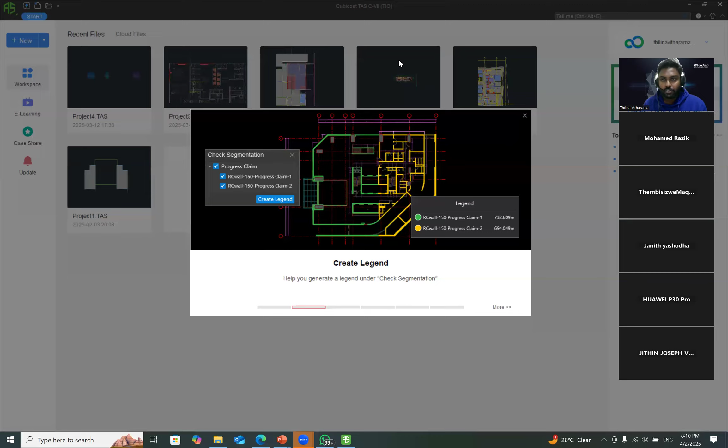Okay, so record your timing. Now the timing is 8:10 p.m., which is night, this is UAE timing, so 10 minutes past 8. Record the timing. I will click on New, then give a name to this project - CubiCost 1 - then I will select the measurement rule.

This software is a little different from other software available in the world - it is embedded with the measurement rule, so you can extract all the quantities according to the measurement rule. This is the difference between CubiCost and other measurement software in the world. I will go with NRM2, click OK, then proceed with the quantification.

Now this is the CubiCost software interface. Time is 8:11. I will go to the BIM project and click on this BIM model, then click Import Revit File, then click this folder icon, then select a 3D model, click Open, and click Open again.

This is very, very important. Now I will select the basement floor, click Next, then click Next again. Then the software will import all the information from this Revit model - it's still less than 1 minute. I will click OK again. This is the Revit model - you can import a complete Revit model within 1 minute using this CubiCost 5D BIM software.

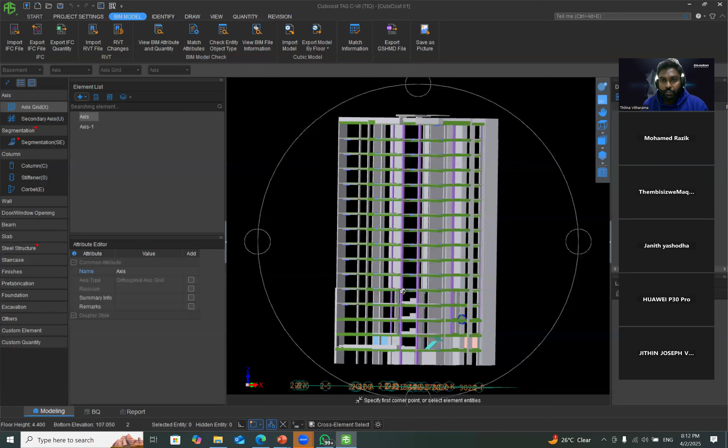This is the BIM model. Now I'm going to quantify this - I will click on Quantity and click Calculate. I can quantify this BIM model using this calculate function. Now you can see a lot of red color elements here - what are those red color elements? I will explain one by one.

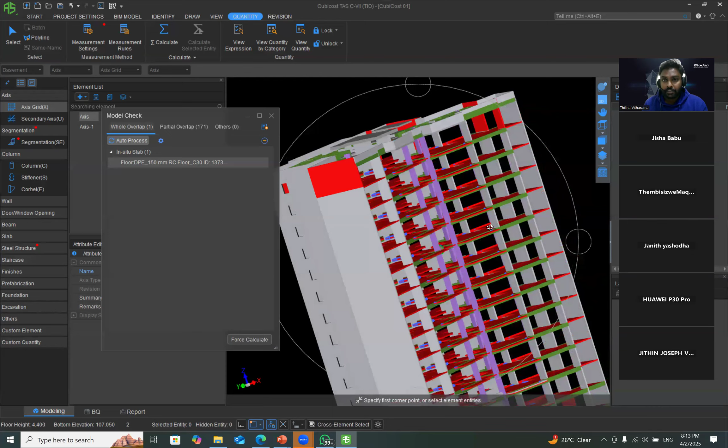These designs will be done by architects or modelers - they don't care about the quantification part, they model the building according to their preference. But we are quantity surveyors - we have to calculate this building by ourselves, and we have to get accurate quantities.

The software is intelligent enough to detect these clashes, and it is intelligent enough to auto-correct these clashes. This is the beauty of CubiCost 5D BIM software compared to other software available in the market. Now I will show you how to do that.

If I go to this partial overlap, and double click on this wall, if I click on this ID, you can see this is the location. This particular wall is overlapping with this bottom wall. You can clearly see this overlapping. The software is intelligent enough to identify these overlappings. We call this clash detection.

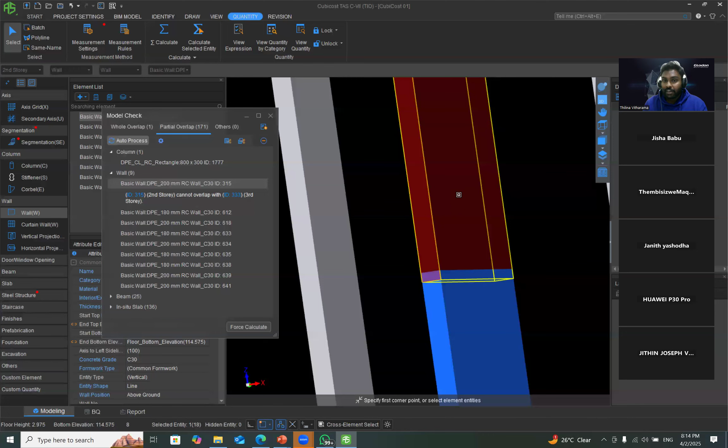This is the only software available in the market with this particular feature. So after identifying these clashes, the software is intelligent enough to correct them. If I click on this auto process, the software will eliminate the clash. Now you can see no clash. This is the beauty of CubiCost 5D software.

If I go to this whole overlap, I can see this particular slab is totally overlapping with another slab. And if I click on this auto process, I can eliminate this clash. Then I can proceed with the quantification. This is the beauty of modern quantity surveying.

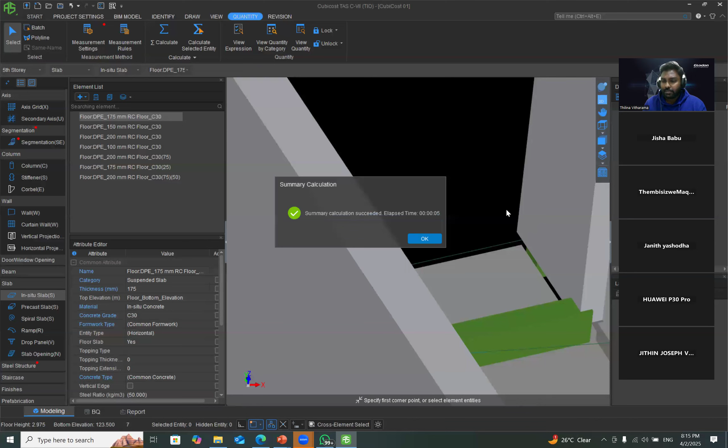I spent less than 5 minutes, and I detected all the clashes and calculated this building. So you can see the quantity report like this for column, wall opening, beam, in-situ slab, slab opening, staircase flight, room, wall finishes. I have calculated every element. This is very important.

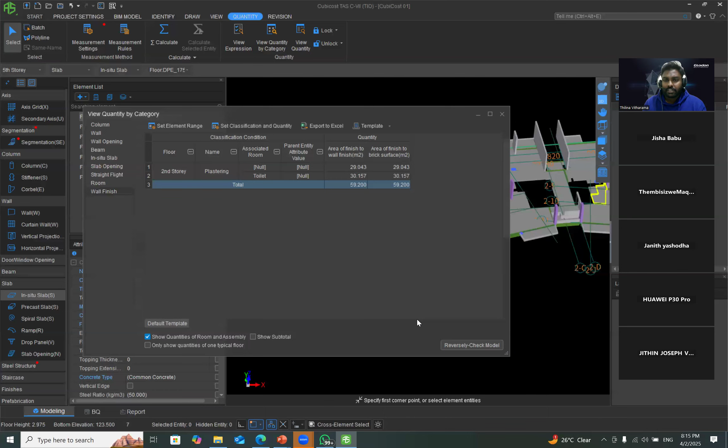We are quantity surveyors. We don't trust these quantities just because a random guy came and told us this is the most advanced quantity surveying software in the world, and he has calculated the quantities of this building. Why should we trust this random guy? Those are the questions inside your head. I will resolve those issues one by one.

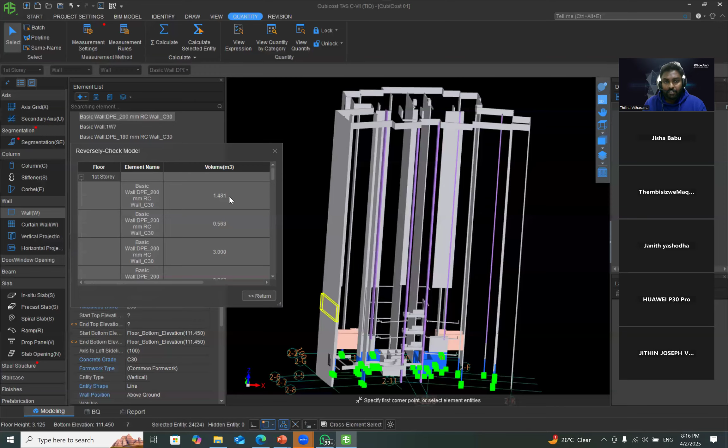The software is intelligent enough to reversely check these elements with the quantities. I will show you how to do it. If you go to this wall and click on this particular quantity, you can reversely check this quantity with the model. If I click on the quantity, I can see the location. You can trace back your quantities very easily by using this amazing software.

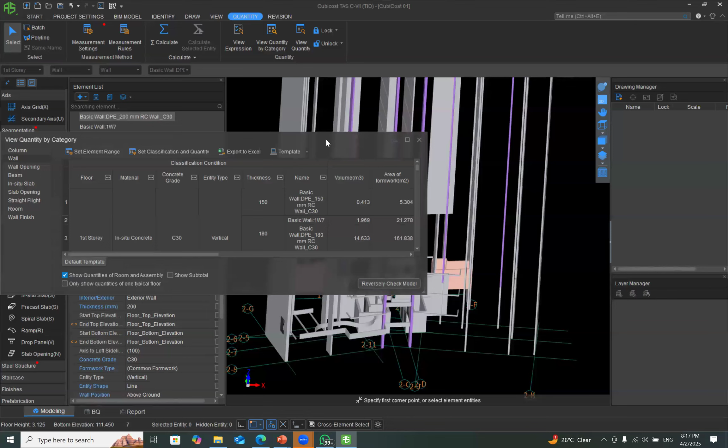Is this enough, quantity surveyors? I don't think so. We are intelligent quantity surveyors. We don't trust these quantities. I can reversely check these quantities, but why should I have to trust this random guy? This is not enough for us, because we are intelligent quantity surveyors. I will show you a few other methods to verify these quantities.

If I click on this particular wall, I can go to this view expression. Then you can see this is the length of this particular wall, this is the height, and this is the thickness, and you can see it deducted the opening, deducted in-situ slab. So you can get the comprehensive quantity breakdown of this particular wall. If I click on this arrow and click on 3D deduction, I can get further elaboration. This is the original quantity.

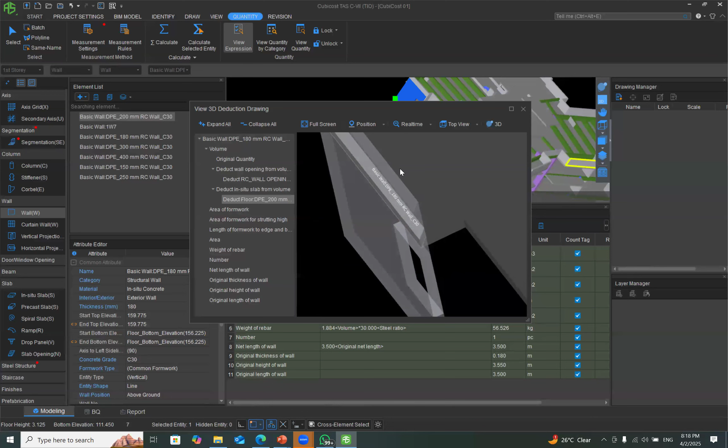This is the wall element, and you can see this is the deducted wall opening, and you can see this is the deducted slab. So you can get 100% accurate quantity according to the measurement rule by using this amazing software.

Is this enough? I don't think so. This is not enough. We can have quantities like this. What is this? If I go to wall, I can see wall volume, and I can see wall concrete formwork. I can see the wall area. But this is not enough.

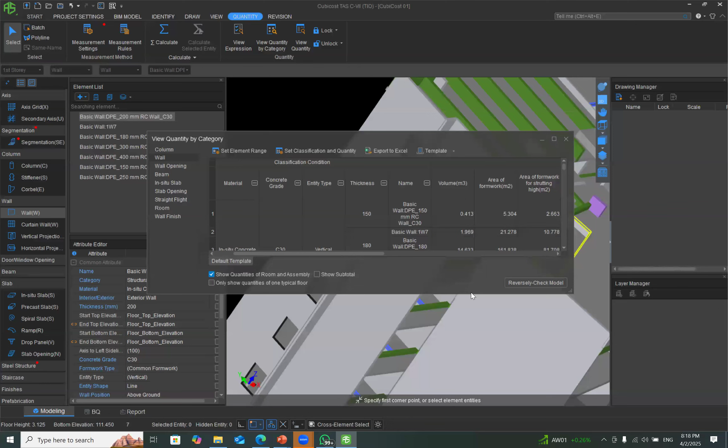We are quantity surveyors. We are more familiar with TDS sheets. If I go to this report and click OK, and go to this quantity measurement sheet, I can generate the quantity measurement sheet automatically. So this is what you want as a quantity surveyor. You can see number, length, width, height, then the volume. We started our quantity surveying journey by preparing TDS sheets, by preparing measurement sheets. This is the exact format. You can see this is the element, and the grid reference, and number, length, width, height, and the volume. This is what we want.

So you can get it by using this CubiCost 5D BIM software. I spent less than 10 minutes and extracted and prepared the measurement sheet of a big building.

Okay, so this is the beauty of modern quantity surveying, and you can easily export this to an Excel sheet. Can you do this by using PlanSwift, Bluebeam, or CostX? Answer is no. This is much more advanced technology than those 2D measurement software. This is the next level. Not only this, but also you can compare a couple of 3D models and you can identify additions and omissions.

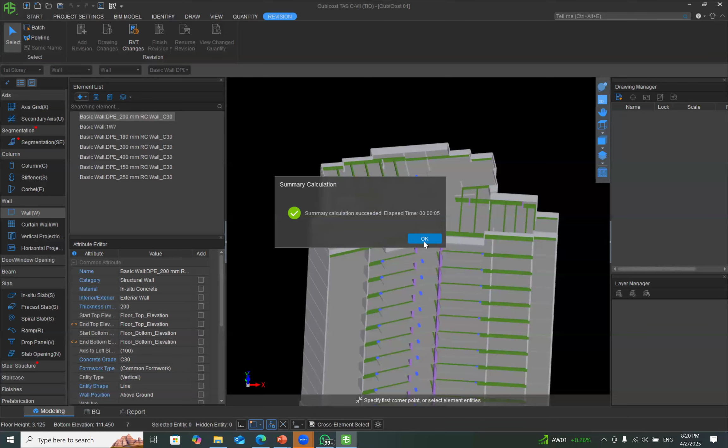I will show you how to do it. If you go to this revision, you can click on Add Revision and you can calculate this particular model. Not only quantification, but also you can conduct variation orders by using this software. I will teach you everything one by one.

Industry is slowly and solidly moving towards building information modeling. 10 years ago, if you take Malaysia, CostX is the most prominent software there. After 10 years, there are 170 QS consultants who are using CubiCost software. More than 500 contractors use CubiCost software in Malaysia. Same thing will happen to UAE as well. I will show you with some evidence.

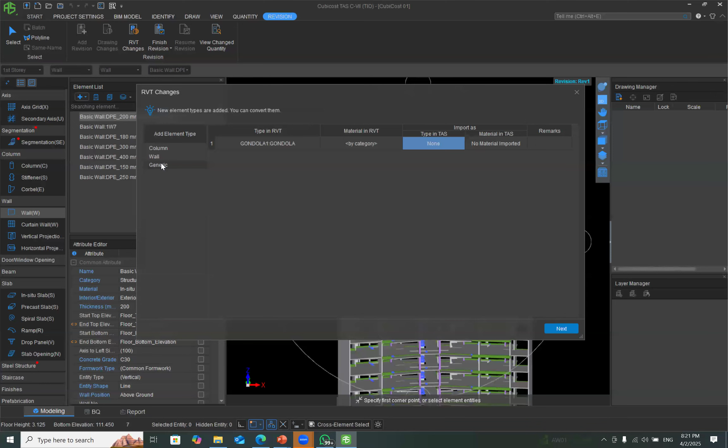So after clicking on this Add Revision, you can go to this Revit Changes and you can select this revision model, click open, and click compare. Can you do this by using CostX? Can you do this by using Revit? My answer is no. So you can click on next, then you can see the comparison.

So these are the newly added elements. You can identify these newly added elements with the Revit ID. This is the beauty of modern quantity surveying. And you can see the deleted items as well. So these are the deleted items. Not only deleted items, you can identify the modified items separately.

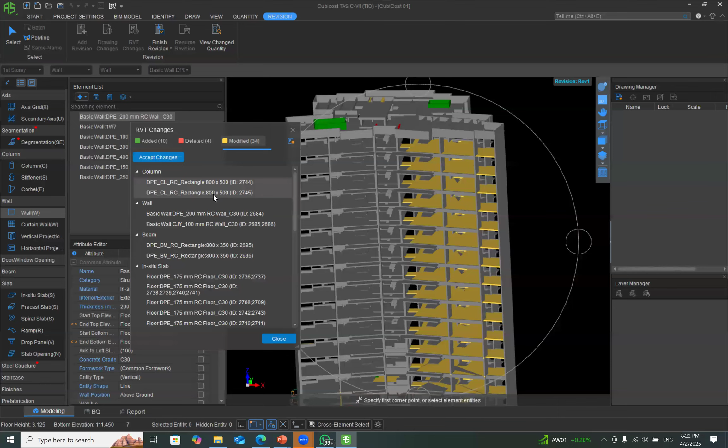This is very important. If you are a post contract quantity surveyor, you know the value of this particular function. Then I will click, I have to select. If you want, you can accept. You can just select these changes and you can click on accept changes.

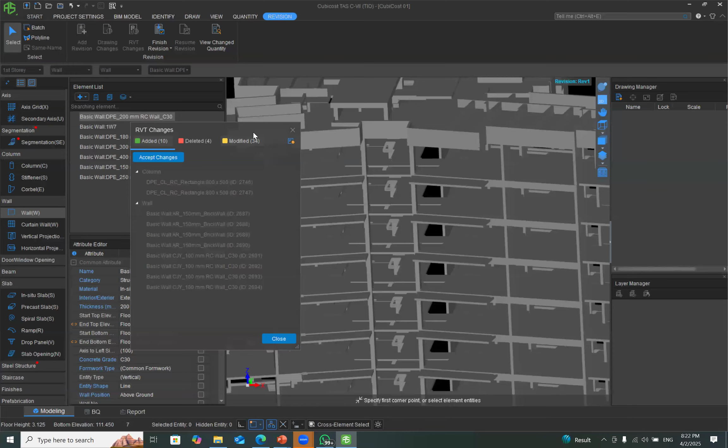If you want, you can keep it as it is. If you want, you can accept the changes. See, you can accept the changes manually. This is the beauty of CubiCost. Accept the changes of these modified elements.

Deleted elements and added elements, then you can finish your revision. These are the Revit changes. Then you can finish your revision. Then you have to calculate it again. You have to calculate it again. Then you can generate the revision model, revision BOQ automatically. I will show you how.

View changed quantity. So you can view the quantities like this. Before revision, after revision, then you can see the changes. See, before revision, after revision, and you can see the changes. So this is the beauty of CubiCost 5D software.

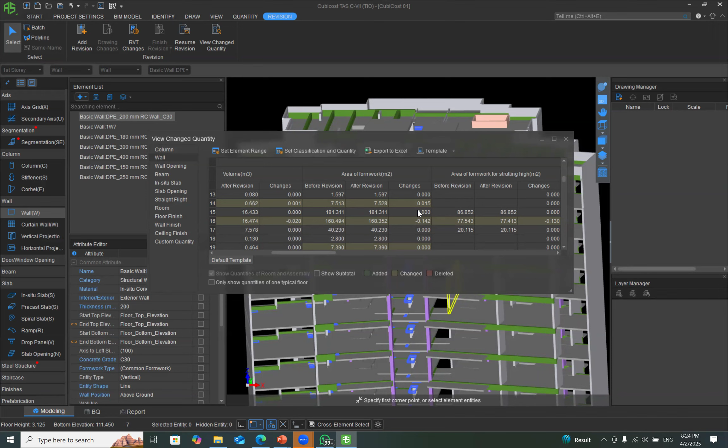Before revision, after revision, changes. If it is minus, it is omission. If it is a plus, it is addition. So this is the modern technology you have to get adapted to. Thank you very much again for your kind participation. I think you have got a very good understanding about the advancement of this technology.

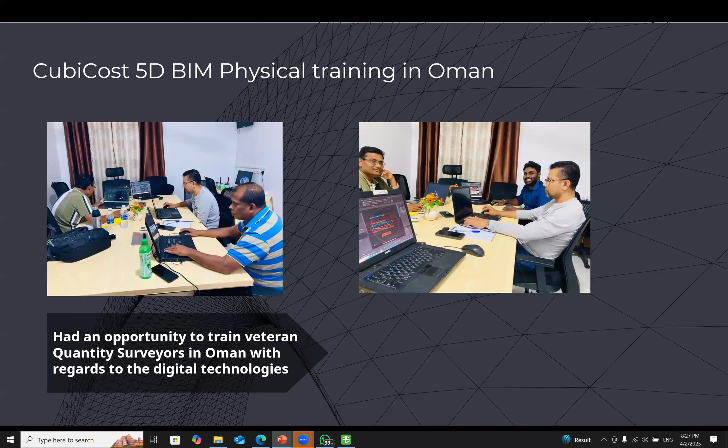This is the first CubiCost 5D training back in 2021, and this is physical training conducted by me in Oman with regards to this CubiCost 5D software. These are company visits with Glodon officials.

This is Mr. Wataru Matsumoto. He's vice president of Glodon, and previous president of Panasonic Thailand. This is another company visit, and physical training in China State UAE.

In UAE there are more than 100 quantity surveyors. This is my QS software all-in-one batch, first batch - 110 students participated for this course. The previous course had 170 students, before that 188, and for this time there are 250 registrations also.

This is the final year BIM module for KDU students, and this is my BIM with Revit and Navisworks course. This is Gleeds staff training - you can search the name of Gleeds on the internet, this is a very old company. Some of these faces are familiar to you.

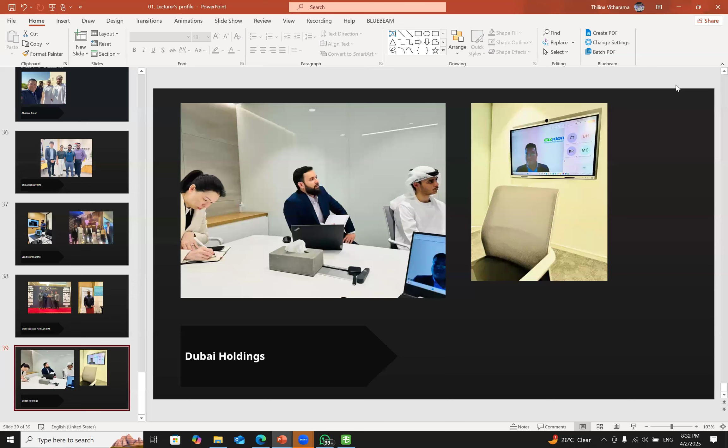So this is about me, and what we have done so far. Up to now I have helped more than 10 quantity surveyors to obtain job opportunities in UAE and Oman, and now more than 13 or 14 companies are using our software in UAE. We need more CubiCost competent quantity surveyors for the Middle East region, because we strongly believe that sooner or later this industry will be fully adapted to this CubiCost 5D software, and as quantity surveyors we have to be ready for that.

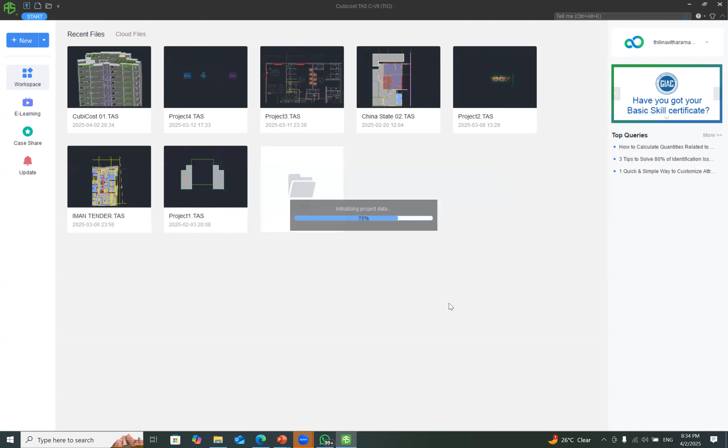I will share my screen again. You can see this CubiCost 5D software. I will start a new project, and this time I will explain the 2D quantification. You can compare this software with other 2D measurement software available and see the difference. I will go with NRM2 again - all the measurement rules available are embedded in this software because we have the latest technology. We reinvest 40% of our profit into software development, research and development.

Now I will quickly go to this drawing manager and import some drawings to this software. I will go to my desktop, then select my drawings. Just give me a moment.

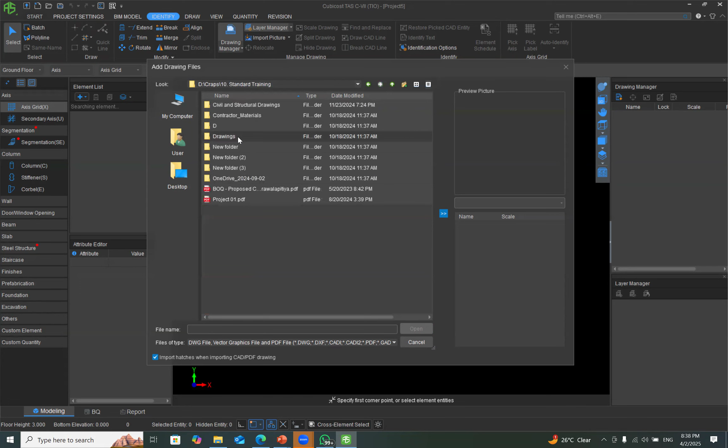Extremely sorry for the inconvenience. I will go to my local disk D, then to this folder, Glodden. We have to find the standard training folder. Under standard trainings, I can see the civil structural drawings. I will select these three drawings and import them - you can see these are some 2D drawings.

First I will go to this split drawing function and separate this structural ground floor. If I click on this name, it will appear here, then I click OK, and this is my structural ground floor. You can select one drawing from this drawing set and split it, and you can see that particular drawing separated like this.

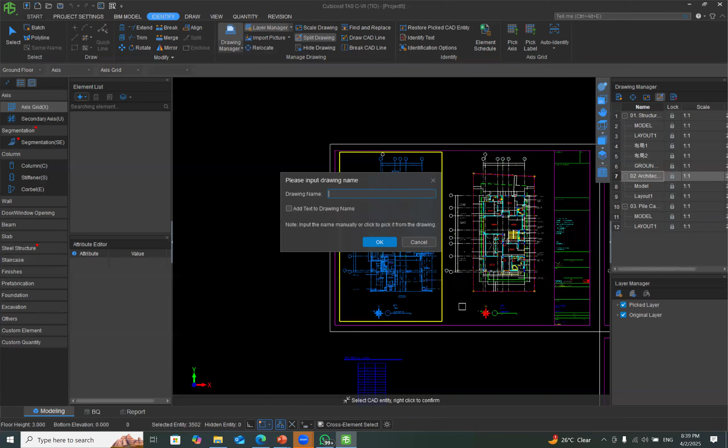Then I will select a drawing from this architectural set. I can just split this drawing - right click, then click on the drawing's name and separate it. I will do the same to this pile cap drawing as well. This is amazing, right? You can click on the name and separate that drawing. So this is my structural ground floor drawing.

Now I will show you the elevations of this drawing. This is the elevation, this is the right elevation, and this is the rear elevation. You can see this is our ground floor level, and the first floor above it, and we have a roof floor too. Ground floor height is 4.000 meters, first floor height is 4.000 meters, so we know the heights of ground floor and first floor.

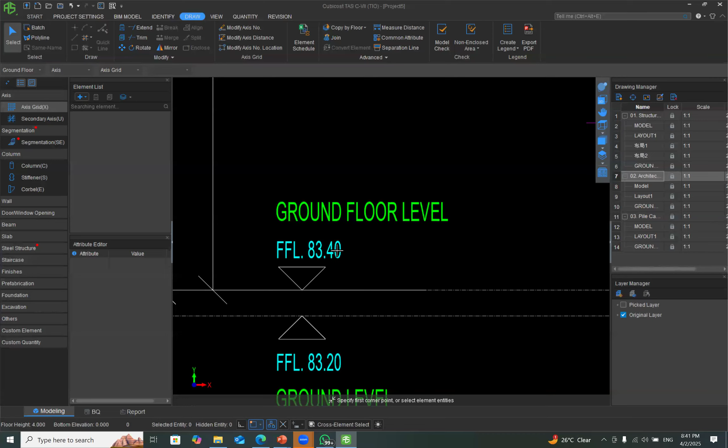After observing these details, we can enter them in this floor setting. I have foundation floor, ground floor, first floor, and a roof floor. My ground floor height is 4 meters, first floor height is 4 meters. Then what is my ground elevation? My ground elevation is 83.4 - this is the finished floor elevation, ground floor level 83.4.

I will go to this project settings and enter 83.4 here. Now you can see I have entered all the details regarding floor heights and elevations. This software is very intelligent - you can select the concrete grade according to your preference. You have to go to the specifications and give the correct concrete grade, then you can extract material quantities according to that concrete grade.

Okay, so this is very important. Then the concrete category - there are a lot of concrete categories: common concrete, lightweight, self-compacting, waterproof concrete. There are plenty of concrete categories. Then the formwork type - you can select the formwork type as well. Then the mortar grade, mortar category, steel ratio - you can give all the details regarding concrete elements in this bottom table.

So after that, we can go back to our drawings, then we can start our modeling. This is very simple. This is my ground floor structural drawing.

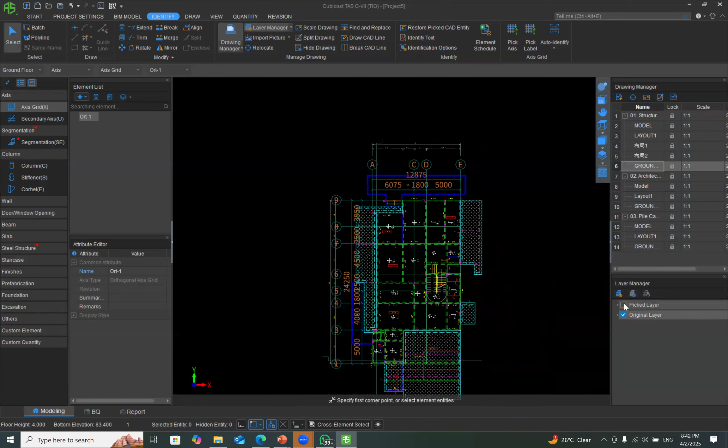I will go to axis, then go to identify, pick axis, right click, pick label. First click on the circle, then the label, right click, then auto identify. So you can generate a separate axis grid line for your modeling, because we need these grid references with our quantities. We can enhance that benefit through this CubiCost software.

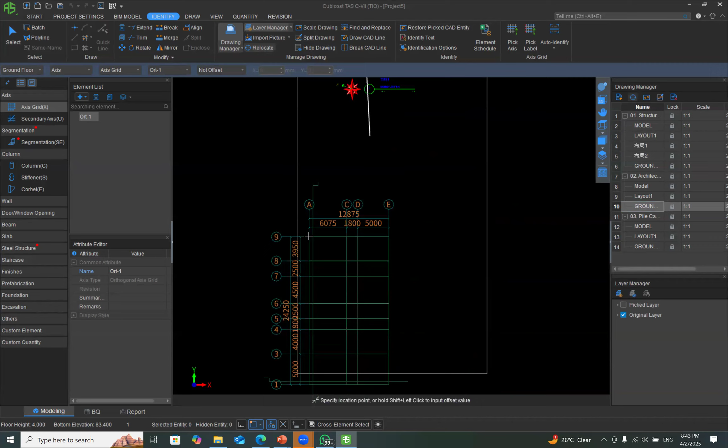So after creating the axis grid line, I have to align other drawings with this axis grid line. This is very important - we have to align, because we are generating a 3D model, axis grid line A, axis grid line 9. So we have to align this drawing's axis grid line with our pre-created axis grid line.

Now it is very simple. I will go to this structural drawing and start the modeling. I can go to column, then click on pick sideline, then click on the column, right click, pick label. I can click on the label, right click, then click on auto identification.

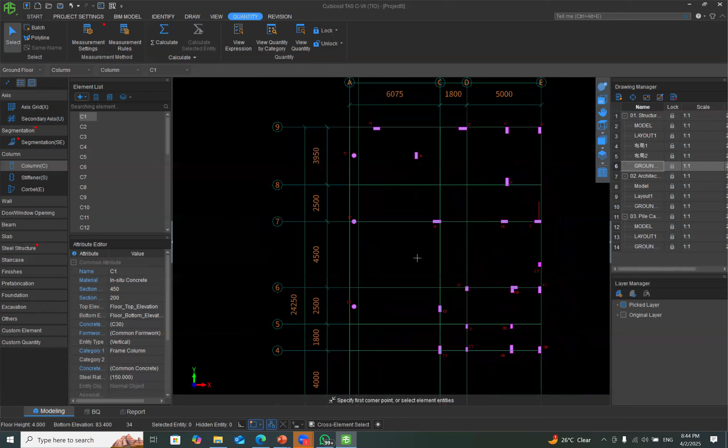I can generate the columns within 1 second. After that I can quickly go to the quantities and click on calculate. I can proceed with the calculation and get all the quantities of these columns within a couple of seconds - volume, area of formwork, numbers, weight of rebar, everything within a very short period of time. So if you have the AutoCAD drawing, this is possible. Even if you have a vector PDF drawing, you can do this very easily.

After this I will show you how to generate walls. It is very simple - you can go to this architecture drawing, then go to identify, pick masonry wall sideline. You can click on the wall sideline, right click, then you have to pick doors and windows sidelines as well - first the doors, then the windows, then right click, auto identify. You can generate all the walls automatically on top of this 2D drawing.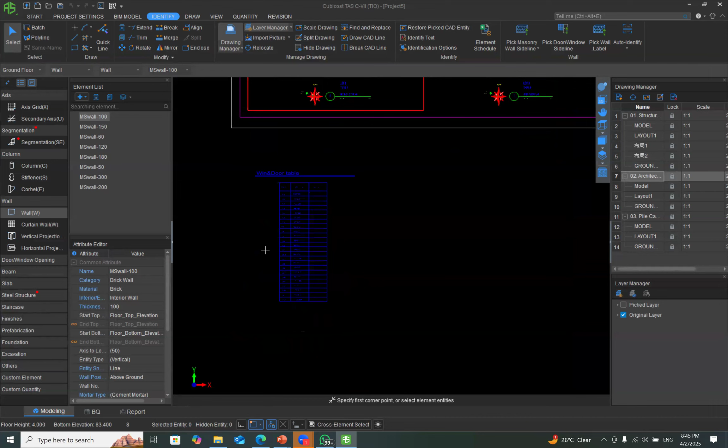Not only walls, but also you can generate doors and windows. You can see the doors and windows table here. The software is intelligent enough to identify every detail from this doors and windows table and import it into the software.

You can go to wall opening and click on doors, then use this auto identification feature to identify all the details. Right click - you can see D1, D2, D3, and all the dimensions. Then you can click identify. So you can import these doors and windows details into the software, then proceed with the modeling.

So this is my ground floor drawing. Then I will go back to walls, identify doors and windows label - pick doors and windows label, click on this label, right click, then auto identify. The software will generate all the doors and windows automatically.

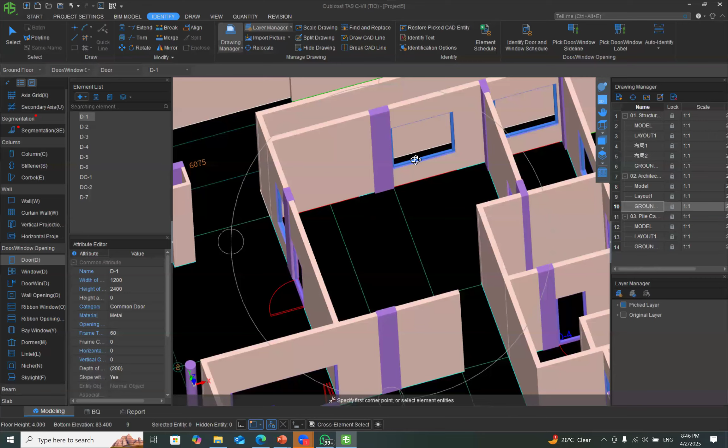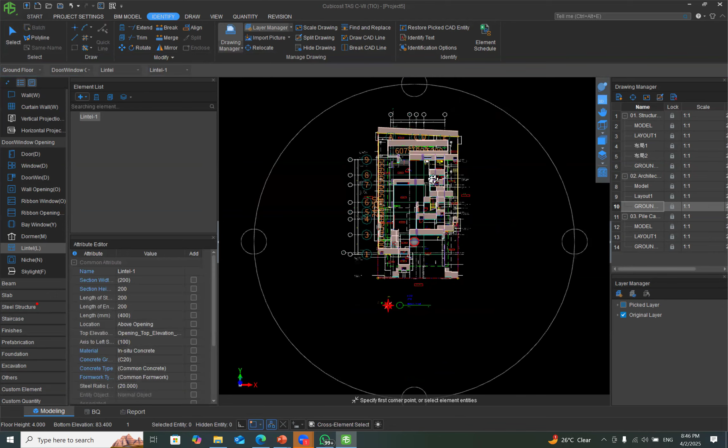Not only doors and windows, but also you can generate lintels automatically. You can go to lintel and click on rectangular lintel, then give the sectional height - I will give this as 200. Then give the offsets - I will give 200 and 200. Then I can go to this auto arrange feature, select this one and right click. I can generate all the lintels automatically, and this is the offset.

Then I will generate all the beams. I can generate all the beams very easily - press the sideline, right click, press the sideline, right click, then the label, right click, then auto identify. You can generate all the beams automatically. Not only beams, you can generate slabs as well - if you have the slab label, within 2 clicks you can generate all the slabs. Within 2 clicks, the software is intelligent.

You can check the thickness. This is the slab. Slab thickness is 175. If you click on this slab, thickness is 150. The software is intelligent enough to detect the thickness from the label and generate the 3D model.

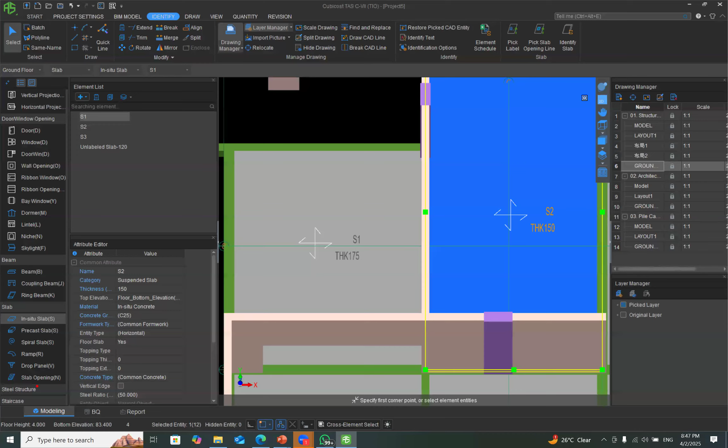This is the modern quantity surveying. In China, no need to click like this. If you import the 2D drawing, the software will generate all the quantities automatically using AI technology. We have the latest technology available in the world, and you can experience that modern technology through us.

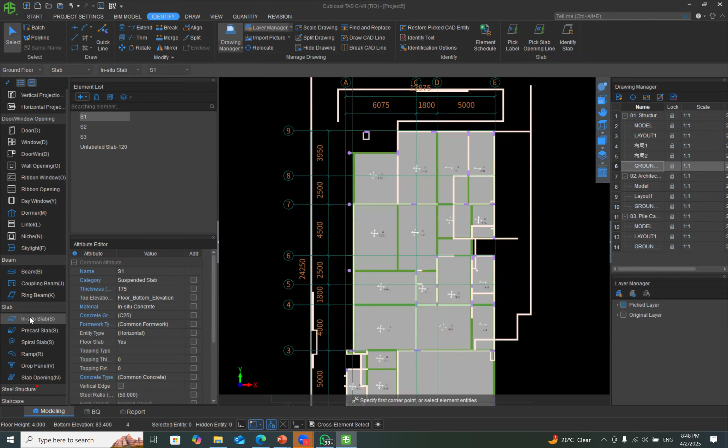Now I will show you how to do the finishes. It is very simple. If you have the finishing schedule, you can directly import finishing elements from this finishing schedule. I will show you how.

If you go to finishes and click on room, you can click on this finishing schedule, then click on export, import file, Excel file, and select this finishing schedule. You can see all the data in this area: floor finishes, exterior wall, horizontal waterproofing, vertical waterproofing, skirting height. Everything you can see. The software is intelligent enough to identify every finishing detail and import it into the software.

I will explain this. You can see entrance - what is the floor finish for entrance? It is cement render. Exterior wall finish is 20 millimeter thick plaster wall. Skirting is 150 by 300, height 150. Ceiling finishes is 20 millimeter thick plaster, with paint. You can identify these data from this table and import into the software.

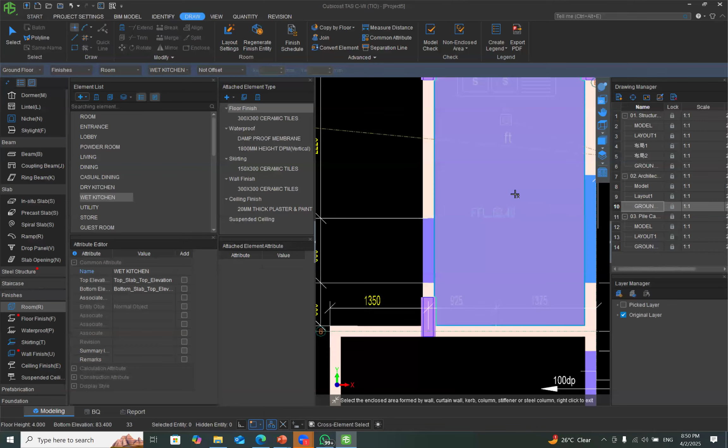Then you have to go to enclosed area. This is enclosed area, and this is wet kitchen - you can select wet kitchen from here. Then you just need to click on this enclosed area and you can apply all the finishes: skirting, wall finish, floor finish, ceiling finish, everything.

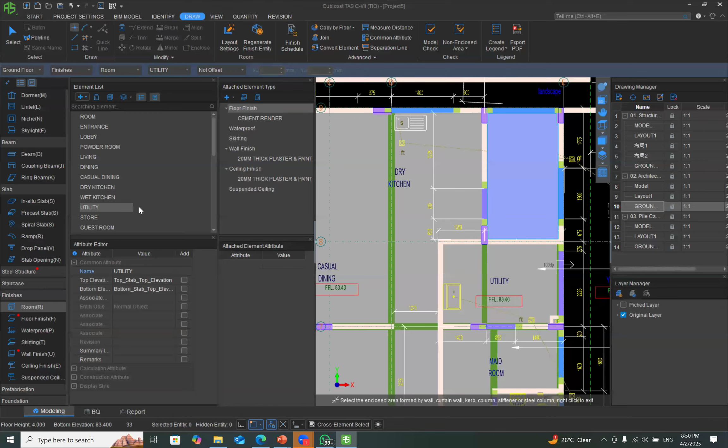You can apply the finishes automatically if you go to utility and easily apply the finishes. If you want to apply finishes for this dry kitchen area, you can use this separation line and separate this area like this, then apply finishes separately. If you go to this dry kitchen and click on this enclosed area, you can apply finishes separately. This is the modern technology you have to get familiar with.

This is how you extract 2D quantities from a 2D drawing. This is the modern way of quantity surveying. If you have any question, please feel free to ask.

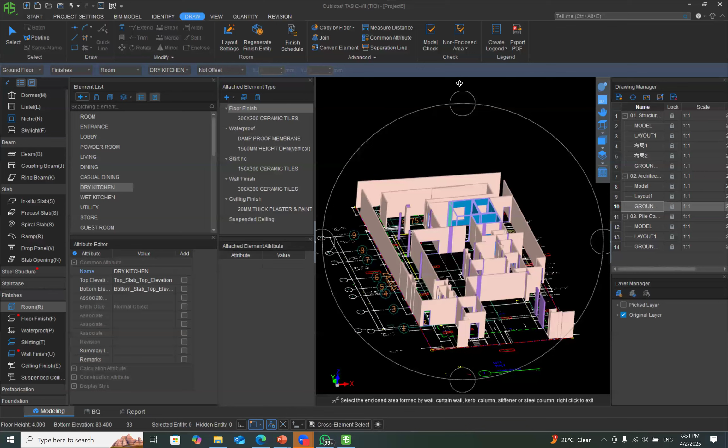Can you do the same thing using PDF drawings? Of course, yes. If you have a vector PDF drawing, you can use the auto identification feature and identify all the elements and generate the 3D model. Even if you have an image, a 2D image, you can generate a 3D model on top of it. So this is like a combination of all other quantity surveying software available in the world.

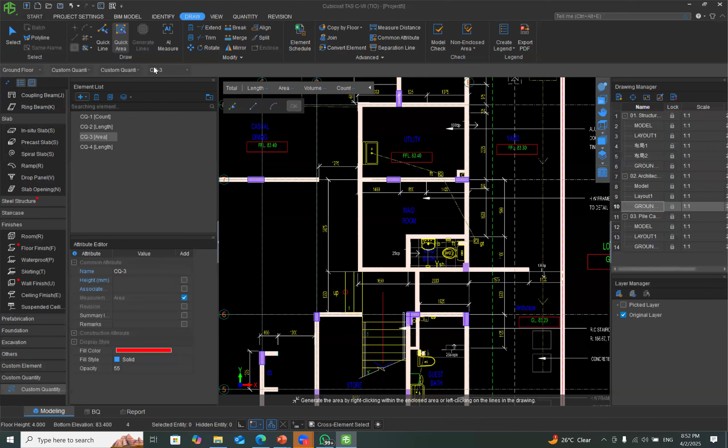If I go to this custom quantity, I can do manual counting, like this. Then if I want to extract the length, I can go ahead and click on this line, right click, then calculate the length. If I want to calculate the area manually, I can go to this area, right click on it, and click OK. I can extract the area as well.

Like this, you can do manual quantification, you can do auto quantification, and you can do many more things. This is the most advanced quantity surveying software available for quantity surveyors, the most advanced, part one.

Very simple - you can calculate the quantity of this enclosed area. Just need to right click and click OK. You can generate the quantity. After that you can adjust it like this.

See, this is the beauty of modern quantity surveying. Okay, if you have any question, please feel free to ask.

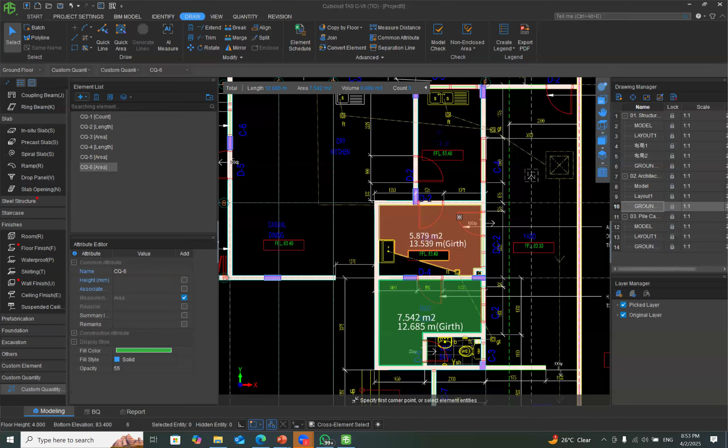What do you mean by AI measure feature? AI measure is our next big thing. If you use this AI measure, software will identify the lines by using AI tools, then software will help you to measure the area. This is a very advanced feature, and software will learn from your drawing. I think you might have heard about machine learning. Software will learn from your drawings, then you can use those learnings for your future measurements.

It's very advanced. Actually, China has a much more advanced AI measure tool. You just need to import the drawing to the software, and AI will measure everything and provide you the quantity report. But the global version still has some limitations. Within a couple of years we will release the full AI software to the market. As quantity surveyors, we have to adapt to this new technology, otherwise it will be hard for us to survive in the market.

Now I will explain a little bit about the Glodon company and validity of this certificate. Glodon is a very big company, a multi-billion company, and we care about efficiency, cost management, quality control, and sustainability.

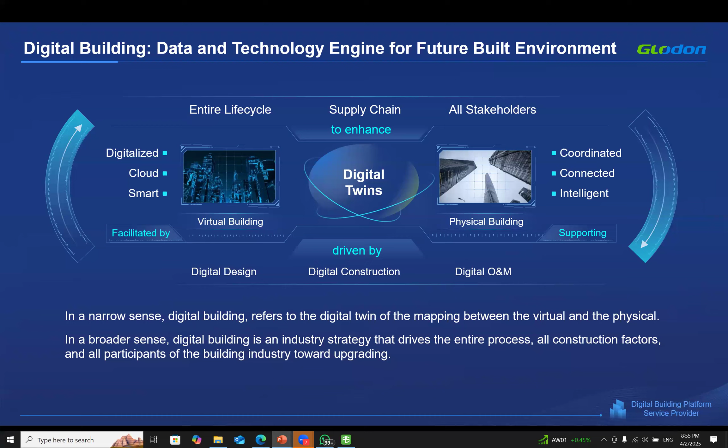Data management is very important in construction industry. Building information modeling is the best way for data management. I will give you a few insights. Most of you are young quantity surveyors now, but after 10-20 years you will become quantity surveying managers, and you have to face these kinds of challenges.

No one wants their work to be transparent. This is a common issue in the construction industry. No one wants to be transparent. Most people try to do fraudulent work. No one wants to take the initiative to learn new technologies and software. This is the common nature. After you become the manager, you will see this.

Your subordinates, or your co-workers, they don't want to take the risk and learn new technologies. The people who work under you don't want to take initiatives and learn new technologies. They're reluctant to do it. That is human nature. No one wants their experience to be devalued.

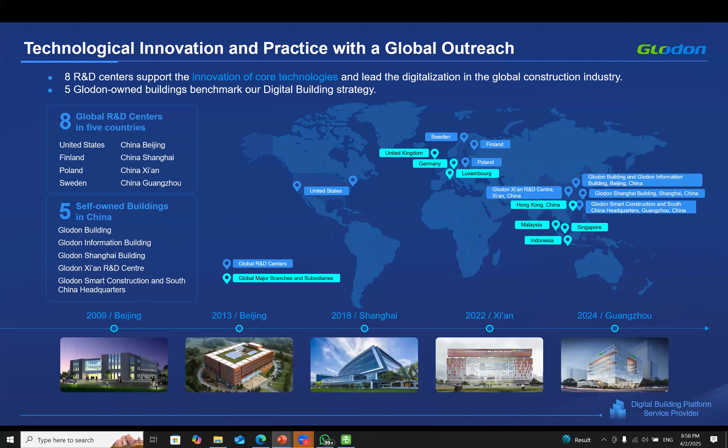We have acquired many building information modeling software companies from the UK, Sweden, and Finland. Most of the European building information modeling software now runs under the Glodon name. We have 8 research and development centers: United States, Finland, Poland, Sweden, and some research and development centers are in China also - you can see Beijing, Shanghai, Xi'an, and Guangzhou buildings. We have more than 10,000 employees, and this is a very big company.

We have construction industry specific parts with proprietary intellectual property rights. We have a lot of patent rights for software development, and we have the most advanced proprietary 3D graphic and design platforms available in the world, and our software is rich with AI applications. You can see some graphic platforms in this picture, and we have more than 130 software products: design software, cost management software, digital software, 5D BIM software, smart site management software, facility management software.

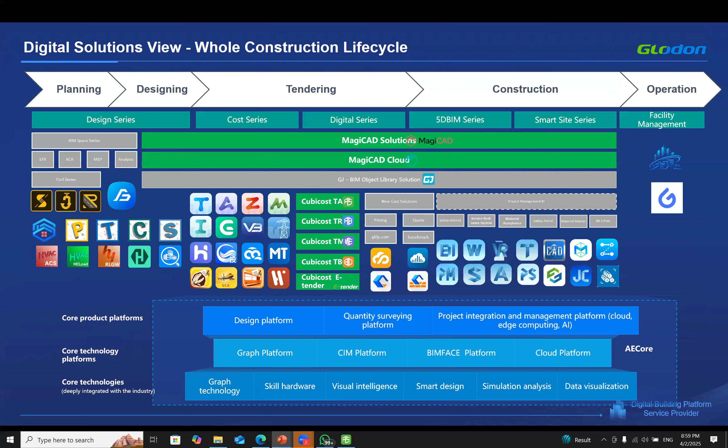Now I'm going to present to you this CubiCost 5D BIM software, which is under cost management. We started our AI journey from machine learning, then moved into deep learning, then generative AI, then we established the AI Innovation Institute back in 2024. We have more than 130 module products, and we want to become the super brain of the construction industry.

Glodon is a very big company. You can see our income is 854 US million dollars. We have acquired 22% of market share in the Chinese construction software market.

Autodesk, PMS, Bentley, and all other competitors are behind us. The overall market is 3.8 billion US dollars, and we have acquired about a quarter of this market. Why 5D BIM digital transformation? We need to get the data from a single source, so data management is very crucial. Most software uses 2D logic, but we have introduced 3D logic for quantity surveying. If you create this 3D model, you can extract quantity and generate quantity reports very easily, and have those quantities in one platform. This is very important.

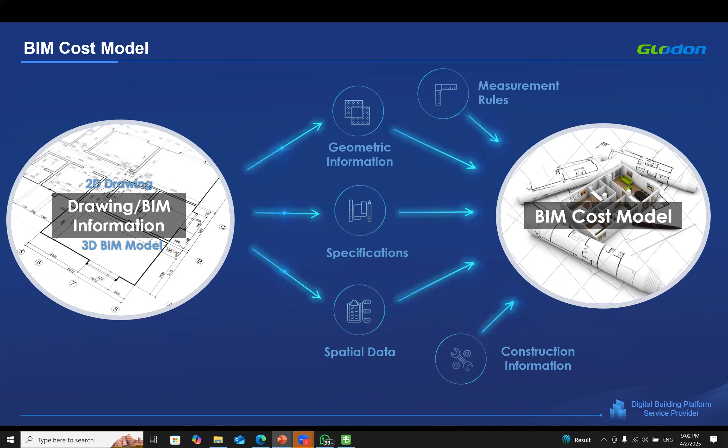This is one focused integrated solution, and you can enhance team collaboration and common data environment management. The software is embedded with measurement rules, and you can generate smart reporting as you witnessed earlier. You can import 2D drawings, building information models, PDF drawings, vector PDFs, and images. We have auto identification tools, and you can generate a 3D model on top of these 2D drawings. First the software reads the drawing, then generates the cost model, then generates all the reports. We have TAS, TBQ, TRB, and TME. TAS is for structural and architectural, TBQ for cost management, TRB for reinforcement, TME for MEP.

Traditional method: 20-30 years ago we used 2D manual drawings for quantity extraction. After a few years, we adapted to AutoCAD plus Excel, which is still very inefficient. Nowadays we use building information modeling for cost management - it's like a smartphone. CubiCost is the most pioneering software for these 3D measurements. I will discuss all these things in detail during our course.

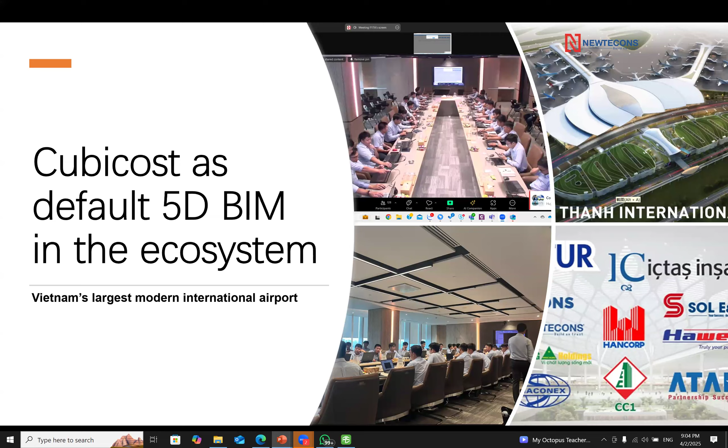What is the reason? CubiCost is the reason. They implemented CubiCost software back in 2019, then completed more than 100 projects using this software. They survived in the Vietnamese construction market. These are some testimonials.

After completing this course, you will get an industry-recognized BIM certification. Our software is accredited by RICS, so this is a valuable certificate for you, and you can call yourself a 5D BIM quantity surveyor after getting this certificate. Now if you have any questions, please feel free to ask.

Okay, enough of boring slides. I will go back to my software again. Now I'm going to show you another magic - this is how we extract reinforcement quantities. This software is intelligent enough to generate bar schedules automatically. You will be surprised after seeing this feature.

This is our TRB software. I will share my screen and show you how to extract reinforcement quantities using this amazing software. This is the modern quantity survey. Can we measure earthwork using the software? Yes, of course, my dear - we can extract earthwork quantities using this amazing software. I will show you how.

I can go to this foundation floor, then go to this pile cap drawing. I will go to foundation and click on pile cap. First I have to go to identify pick sideline. I will click on this sideline, right click, pick label. I will click on this label, right click, and auto identify. I can generate all the pile caps.

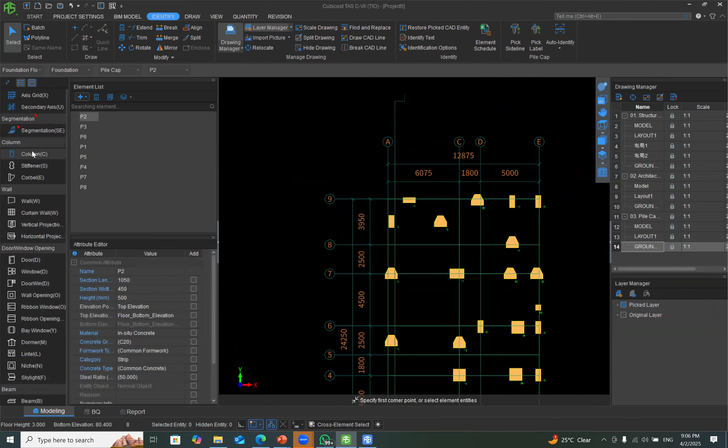Then I have to generate the column neck as well. I will go to this column, click on pick sideline, click on this label, right click, pick label, right click, then auto identify. I have generated the column neck. Then I have to generate the screed as well. I will quickly go to foundation again, then click on blindings. I will click on plus and click on blindings.

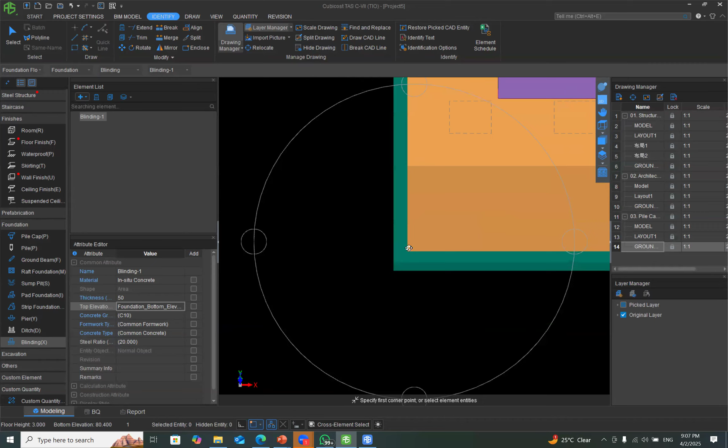I will give the thickness for this blinding. Then I will click on this one and pile cap. Then I will give the offset as 50. You can generate the blinding as well. So this is the blinding and this is the offset. You can change the offset whenever you want.

Then, my dear, you asked me about the earthwork. It is very simple. You just need to go to draw and click on auto generate excavation. If you want, you can give the working space and click OK. The software is intelligent enough to generate the earthworks automatically.

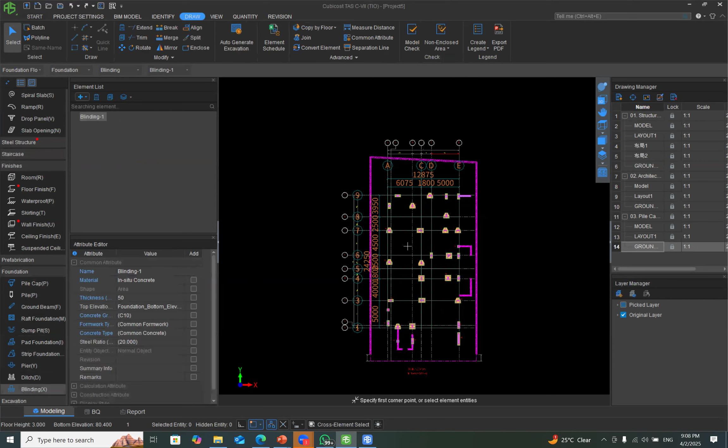I will show you the 3D model. Our ground elevation is 83.4. Then I will generate this excavation. Sorry, not the earthwork support, this is excavation. Like this, we can generate the excavation automatically with the offset.

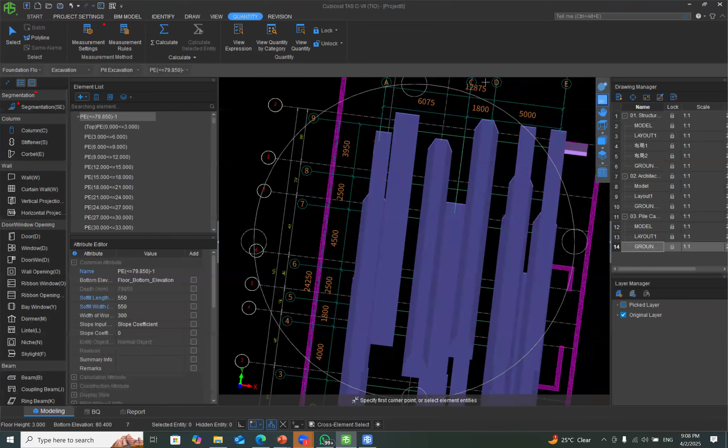83.4. Enter. Wait a second. Under the project information, we have to give the height correctly, then proceed with this. Please give me a moment. Blindings, generate excavation, click OK. Now it's okay. Like this, we can generate the excavation.

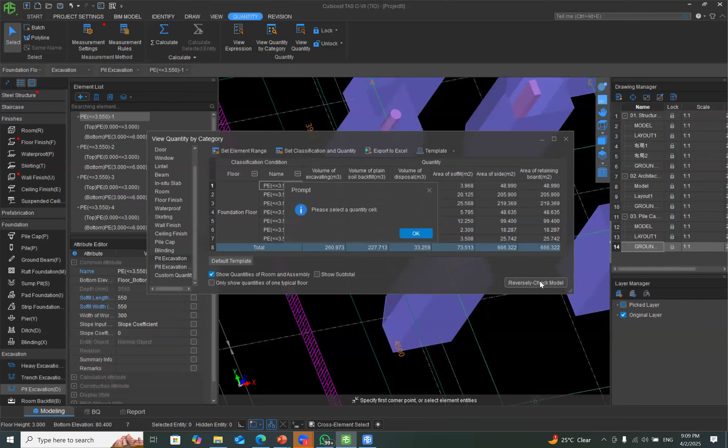After generating the excavation, we can check our quantities as well. You can get all the earthwork quantities. See pit excavation quantity. All the volumes you can see, and you can reversely check with the model as well. You can see the locations. Then you can check other quantities as well. Pit excavation, then volume of excavation, soil backfill, disposal. You can see all the earthwork quantities.

I think you have got a clear answer for your question. Yes. Makuhena, you have got clear answer, right?

Two years ago, we planned to purchase CostX software. So if you check the net worth of CostX and CubiCost, CubiCost's net worth is very high. We have acquired a lot of software from Europe. Recently we purchased MagiCAD, the most advanced MEP design software available in Europe. We acquired that particular software, and we tried to purchase CostX also. But if you have used CostX, 2010 CostX is similar to 2024 CostX. They haven't invested in software development, they are using the same logic. We realized that it is worthless, and we didn't purchase CostX software.

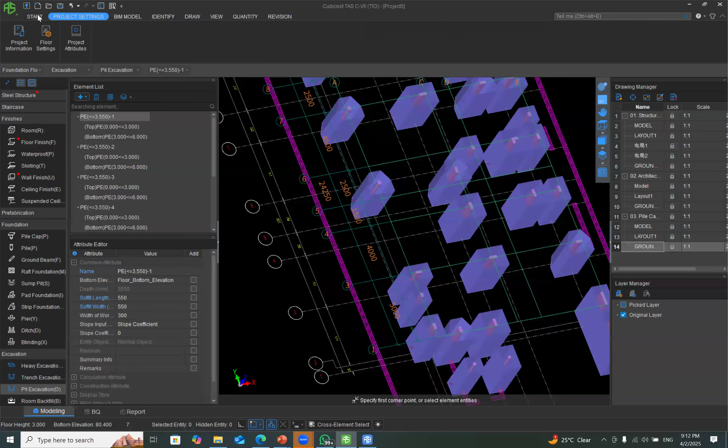Then I will show you a little magic. You can see this is a 3D model I have done by using this Cubicost TAS software. This is the 3D model we have generated now, right? We have generated the 3D model, something similar to this. I will open one.

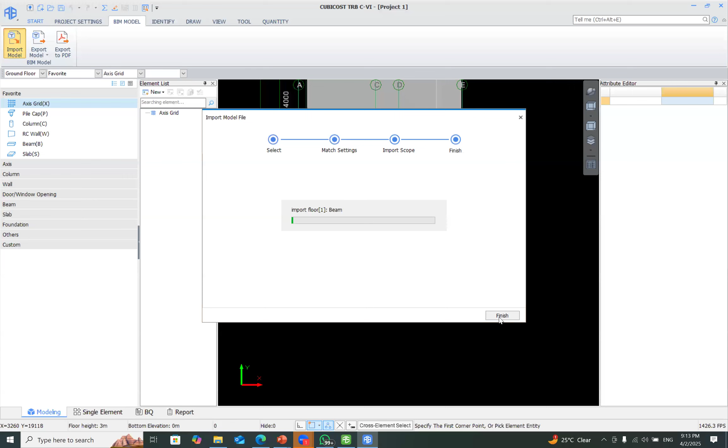So this is the 3D model we have generated. Now I will save this, go to export Revit model, export model by floor, and export this model and save it in my desktop. Then I will go to TRB software, go to BIM model and import model. Then I will click on this folder icon, select this project and click on open. I'll click on start and next step. So this is interoperable model generation.

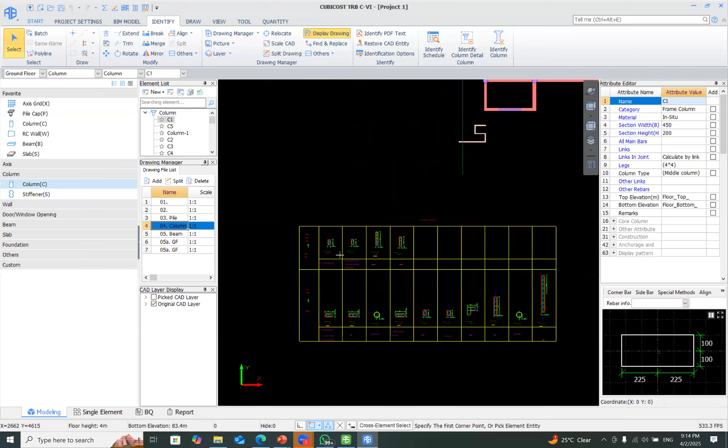I opened my TAS model from this TRB software. Now I'm going to inject reinforcement information for this model. I will go to column, then go to this identify and click on drawing manager, click on add, and I will import some drawings to this software. Again I have to find the standard draw - standard training, then civil and architectural drawings. I will select these 6 or 7 drawings. I can see the column detail. So this is my reinforcement information for the columns.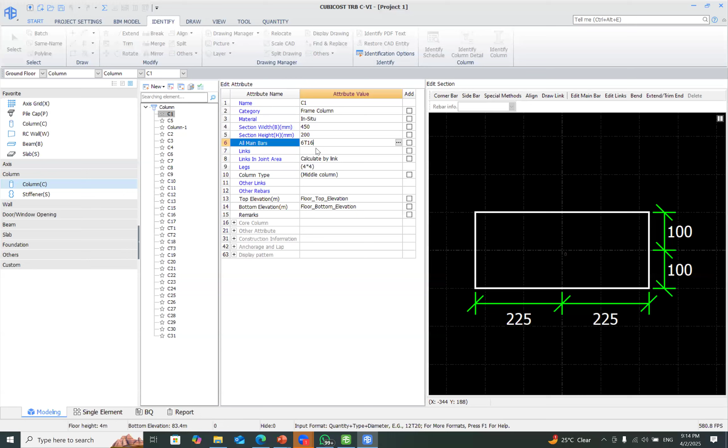You can see C1 column. 6T16 is the main bar information. Link information is R6 at 175, and we have one hook for this C1 column. I will double click on this C1 column and enter all the reinforcement information: 6T16, links R6 at 175, legs 3 by 2, 3 by 2. I can see one hook here. So after giving this reinforcement information, I can see the model. I will go to quantity and proceed with the quantification.

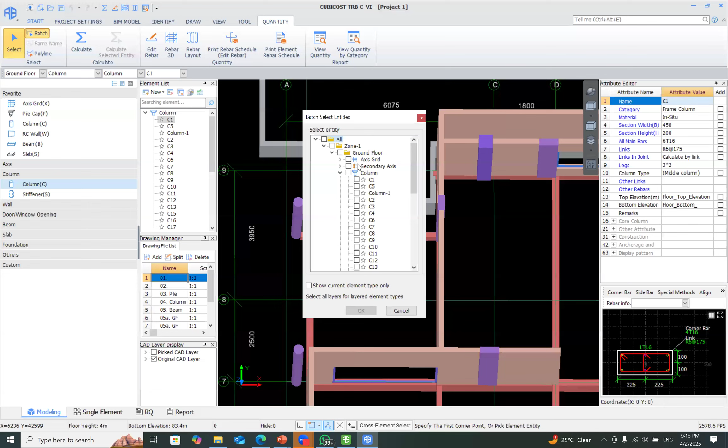After proceeding with the quantification, I can see the 3D visualization of the reinforcement arrangement. This is very crucial. I can select the column and see the 3D visualization of the reinforcement arrangement. I can isolate the column and see it separately, with all the main bars and all the links visible in 3D.

Not only this, but you can also generate the bar schedule automatically. Print element rebar schedule, and you can see all the bar shapes, cutoff length, total numbers, total weight, and all the remarks. This is modern quantity surveying.

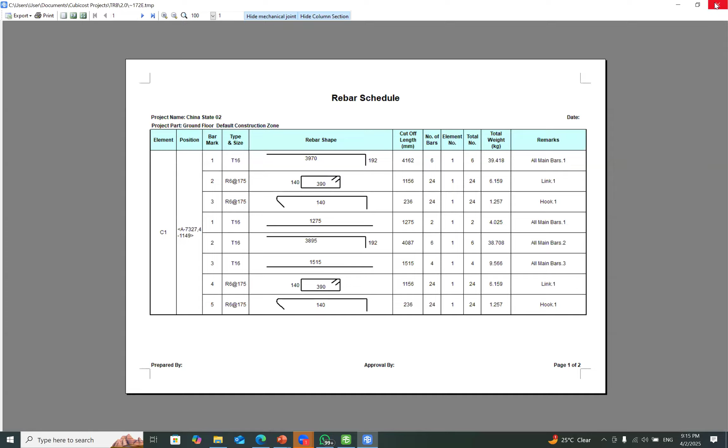Not only this, there are a lot of similar columns. You can see there are a lot of similar columns: C3, C4, C6, C10, C11. These columns are similar to C1, so you can synchronize this reinforcement information with those similar columns. This is the beauty of quantity surveying. C3, C4, C6, C10, C11,

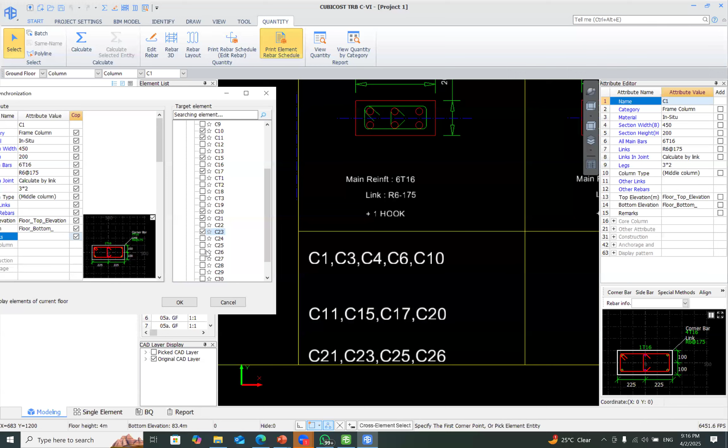C15, C17, C20, C21... extremely sorry, C23, C25, C26. We can synchronize reinforcement information across all these columns.

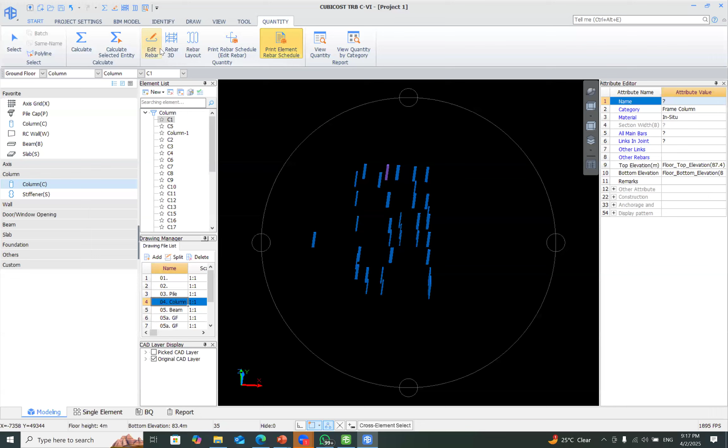See the beauty of CubiCost software. If you adapt to this software, you will be unstoppable. You can just select these columns and see the 3D visualization after calculation. You can calculate first, then see the 3D visualization, and you can identify those synchronized columns. See, this is the beauty.

And you can see the bar schedule as well. So this is the beauty of CubiCost 5D software. This is the reinforcement software.

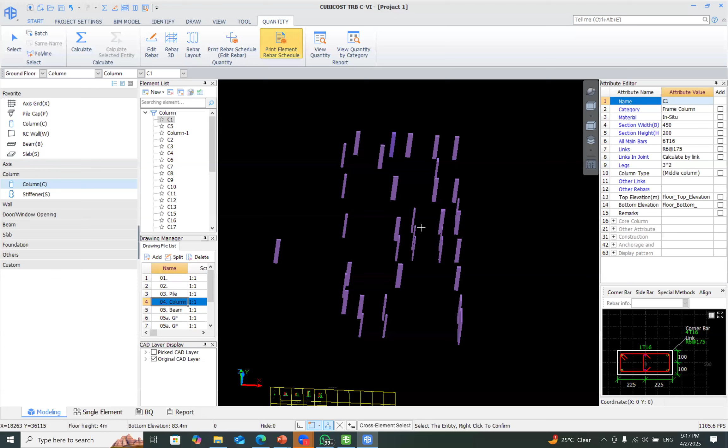I will show you about our MEP software, TME. This is the MEP solution. I will quickly explain how small this is.

Terina, yes. Is there any particular option to feed the information like bar diameter and the links and all? Is there any automatic option to feed it? What do you do, from drawing?

If you have the bar schedule, you can scan the schedule and import the information automatically. Oh, it works in that way. All right, thank you very much for your correction.

So this is the TME software. I will go to new, then click OK. I will open the HVAC drawing and explain. I will go here and find my drawings again, then go to this HVAC drawing and import it. So this is the HVAC drawing.

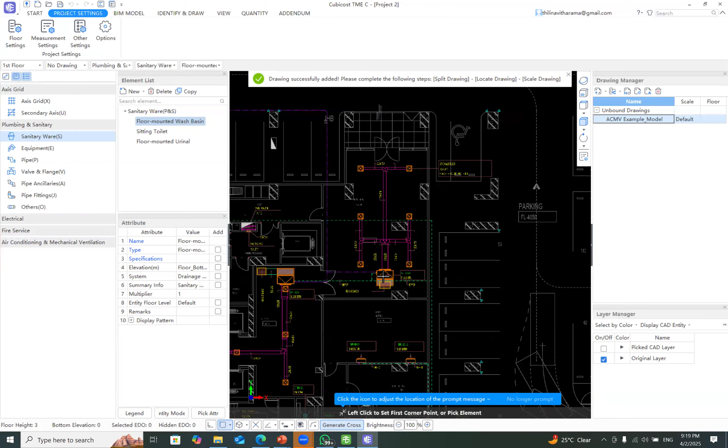I want to measure the ducts. So there are a few options. I will go to air conditioning and mechanical ventilation, then click on air ducts. First I will show you the first method. It is very simple: you can use this double line feature.

If you click on double line, rectangular air duct, double line, first you click on this line, then the disc, then the second line. Let's measure this one, this line: 350 by 350, height 250. So you can use the double line, click on this line, then you get the duct.

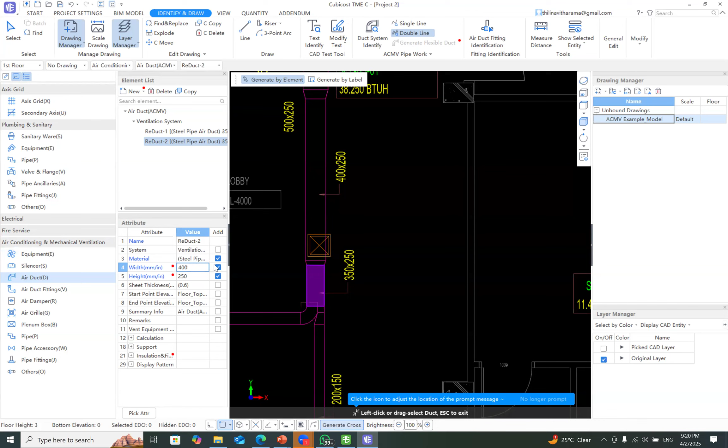If you want to generate this one, this is 400. You can click on 400 and 250, then click on this line to generate it. So this is the manual way. This software is very intelligent, so why use this manual way? No need to use it.

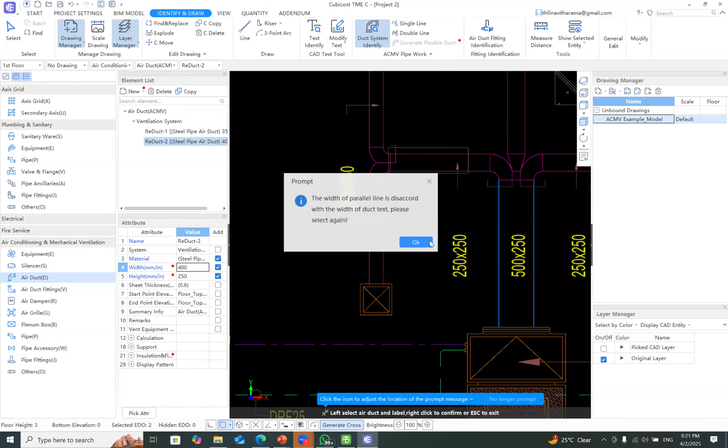If you go to this duct system identification, you can do: 1 click, 2 click, 3 click, right click, then 1 click, 2 click, 3 click, right click, then click OK. Then you can generate this duct system automatically, so no need to use the double line feature. Then you can go to duct fittings identification, select the drawing, right click, and generate all the fittings as well.

If you want to calculate these air grills, you can isolate all other elements. You can use select by layer to isolate these air grills like this.

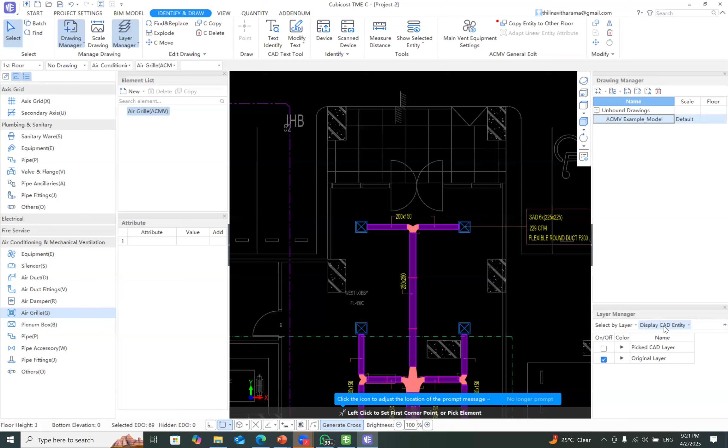Then you can measure separately. Okay, air grill. Then you can go to this device and pick device, select this air grill, right click, identify. So you can use these new technologies to generate these quantities. After identifying, you can turn off the light.

You can see the measured items separately. So this is the TME software, this is a glimpse of TME software. This is much more advanced. We have electrical, fire services, and many more features under this TME software. This is also very advanced software available in the market.

So what are the system requirements for using this software? 4 GB RAM would be enough. You have to have more than 5 GB disk space.

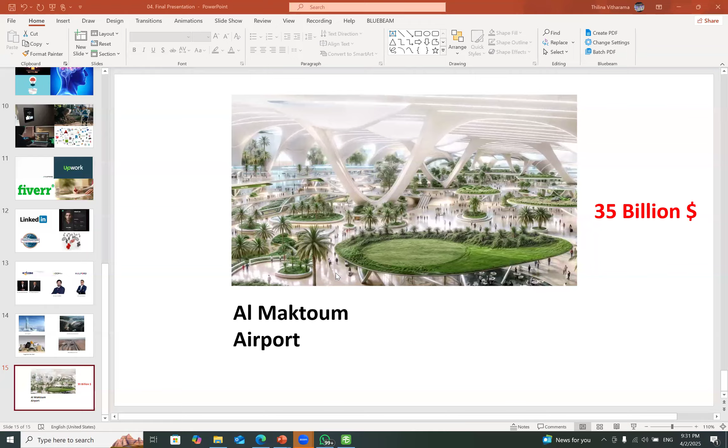So I brought him here. He was just an undergraduate in a Sri Lankan university. I brought him here even before he got his degree certificate. He bought a new car recently, and he sent me a message.

And recently I have also given him a freelance project, 34 buildings for 3,580. This is our relationship.

And I can show you another name. Akila, he came last month to China Railway, where they had an employment visa over there.